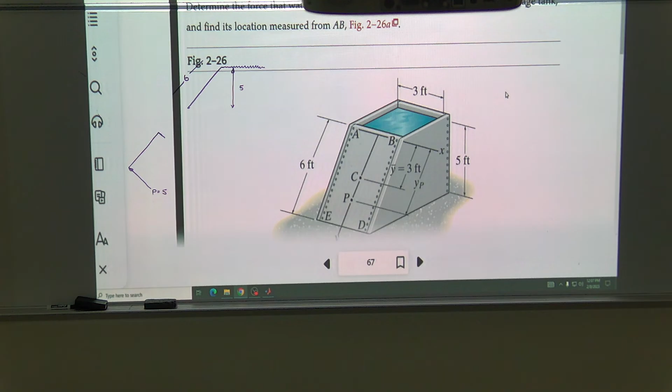Oh, water pressure. Okay, so it is water. So it is gamma times H, which would be 62.4 pounds per cubic foot. And you drop down 5 feet to get there. So the pressure at the bottom, give me a second. Pressure, 5 times 62.4, 312. So the pressure at the bottom is 312 pounds per foot squared.

Now, at the top, since the water touches the very top, it's pretty much nothing. So it's kind of like that now. That little part was an artifact that I should not have put on there. And so the water pressure is pushing up on this thing to try to break these little bolts or drill holes or something. So now the question is the location. He wants to know the value and the location.

In this particular situation, you've got an area which is 6 by 3. So the area back here is 6 by 3, or 18. And the load itself at the very top, if you look at this from this standpoint, you say, I want to turn this into a statics problem. What you really want to do is take how many pounds per running foot. So if I take this and turn it all the way over like that, I will have something like this.

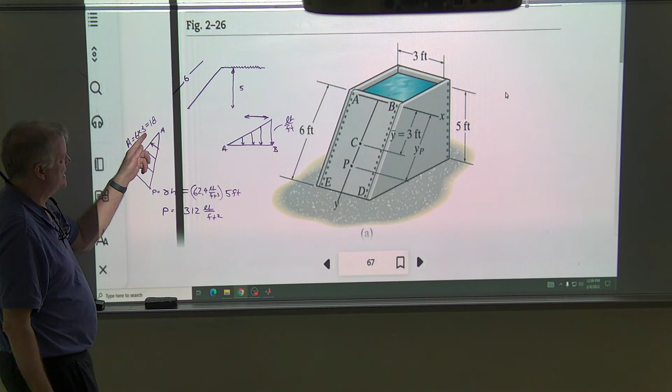So for example, this is point A and this is point B. B being the location of the heavy, A the light. So I essentially took this thing and turned it all the way around like that. Now it looks like a statics problem. However, in statics, you wanted the pounds per running foot running back and forth this way. So what do you do? You multiply it times 3. So essentially, this will be 3 times 312, or 936 pounds per running foot. 3 times 2, 6, 3 times 1 is 3, 3 times 3 is 9.

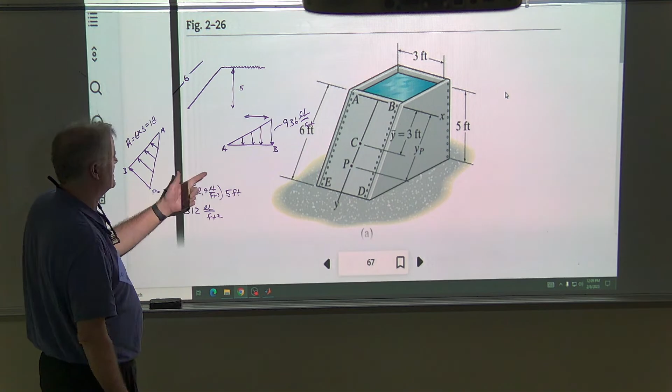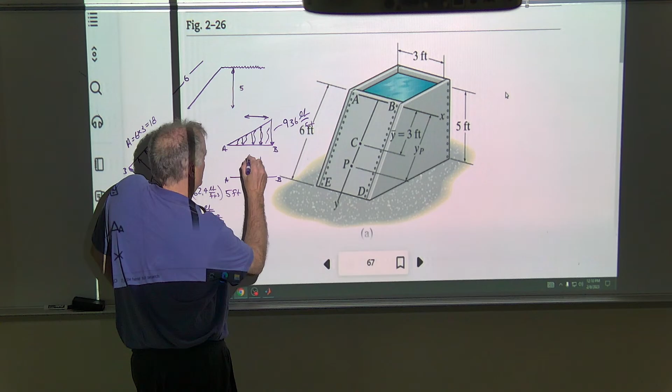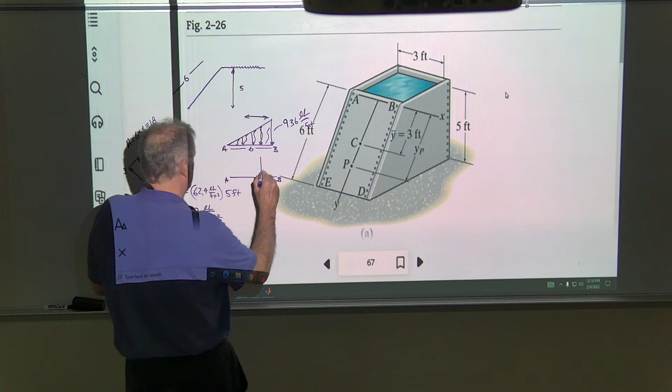Now, you want to replace it with B, A, and a load that sits right here. So what you're doing now is like you did in statics, you find the area of the load diagram. So it is 6 long, and you want half of it because the upper part is gone. So you want 3 times that. Now I've got to do 936 times 3, 2808, and it is located 1/3 from the heavy side. So it just turns out that that's 2.

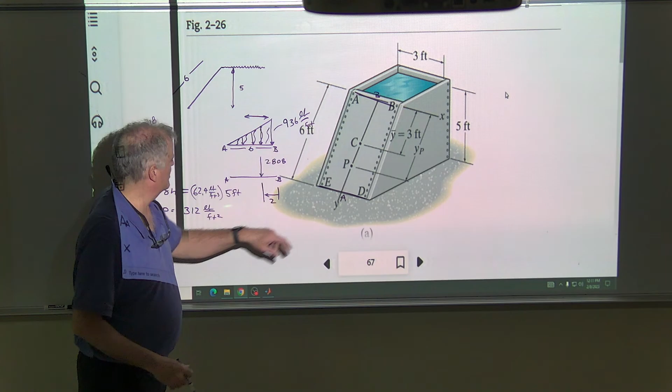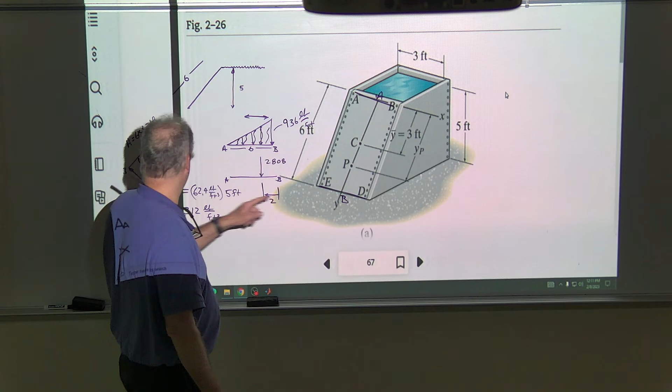So that's the location. The heavy side, now you have to realize this was back over here. So this is essentially the A line, and this is my B line up here. I'm sorry, I got those backwards. B is where the heaviest part of the load is, which is at the bottom. And A is where there's no load, which is at the top. So in fact, if this is 2, then that's 4.

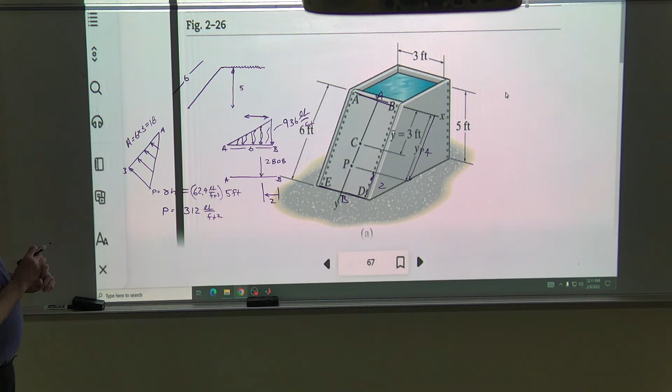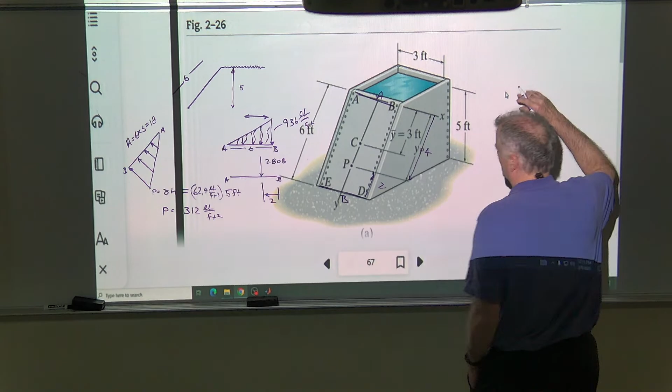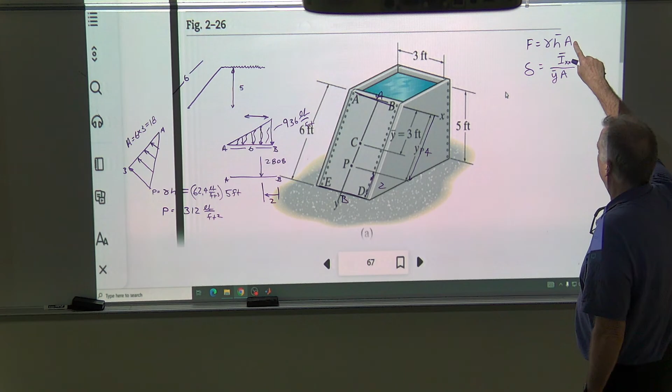Now, let's do this the other way. This is what they call a pressure prism. The other way is you use 2 sets of equations, and this is the reason I picked this problem. F is equal to gamma H bar A, and a little delta is equal to I bar XX over Y bar A. Now, let's look at the top one. The force is gamma, 62.4, the depth of the centroid, and the area of the whole plate.

So here is your centroid. This is C. It is 3 down, but it is also 2.5 here, so its depth is 2.5. Find the depth of the centroid, not this distance, but that distance. This would be classified as Y bar. This is classified as H bar. If you go vertically down, that's H. If you're going out the line of the gate, you're going out the Y. So H bar is 2.5, and the area of the whole thing is 3 by 6.

If you multiply all that out, 2.5, 2808. Okay, turns out that's the same thing you got over here. Now, this other term, what is it? First of all, Y bar and A, that's pretty simple. Y bar is 3 and A is 18.

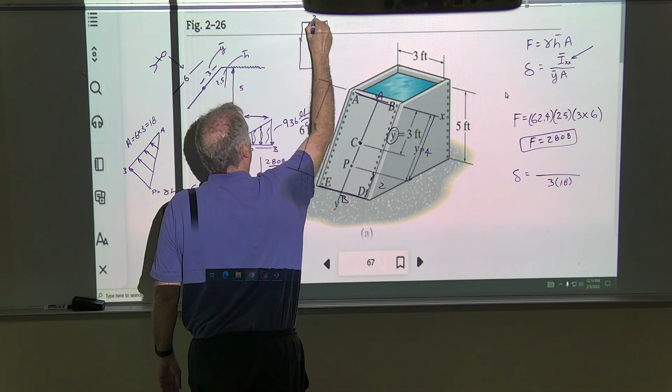But what is that? You stand here, like inside the tank, or maybe out here. You look straight down at this thing. What do you see? You see a box that is 3 wide and 6 tall. The bar says you look straight at the centroid, and then you tell me what I is at that point. I do 2 X's because they're supposed to be 2; it's a tensor. And it's 1/12 the base times the height to the third.

What's the base? The base is 3. Height is 6 to the third. That's the term that ends up on top here: 3 times 6 to the third over 12. Now, let's figure out what all this is. It's going to take me a minute. 6 times 6 times 6, and then divide by another 3, then divide by 18. It's 1.

Now, think about this. What is that term on the drawing? That term is very specific. Here's the centroid. This is where the center of pressure is. Center of pressure is the location that if you broke this down to one load, that's where it's equivalently going about. The distance from the centroid down to that is what I like to call delta.

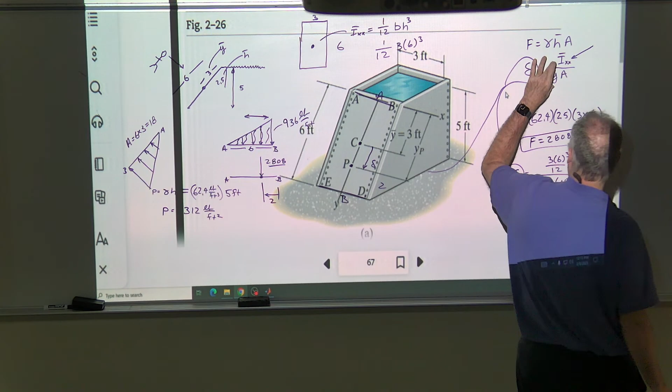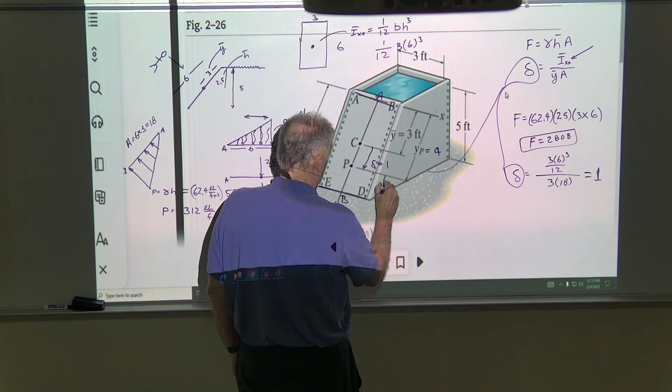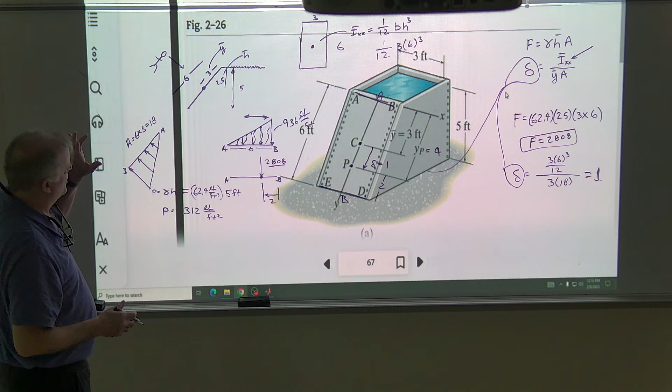And that's, in my mind, what I see. I have to remember that, and that's it. So it turns out that makes this equal 4, because that's 3, this is 1, that makes that still 2. So you matched and got the same answer that way as you got using the pressure prism. This works well if it's a flat plate like this. In other words, the depth doesn't change.

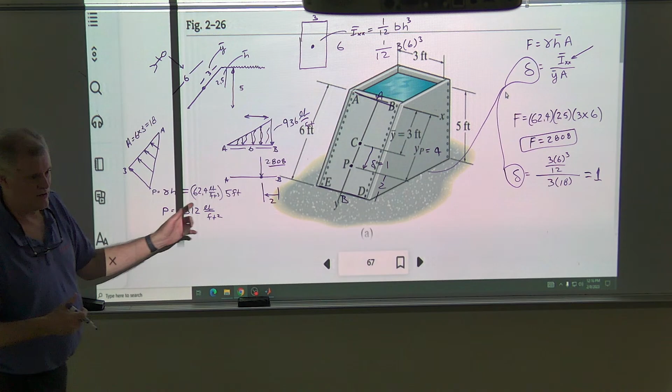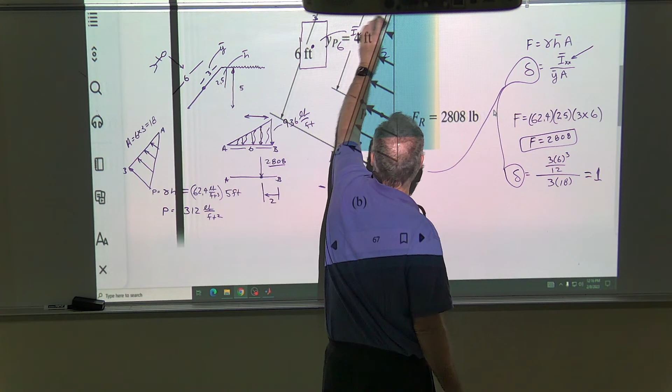And that's why I was going to do this one and then roll to the next page. So let's see what he did on it. It looks funny and skewed here, but the main thing, these are 90 degrees. They should always be 90 degrees. They kind of don't look like it, but they're supposed to be 90 degrees. So of course he got his resultant force of 2808, and he put down 4 and 6, and he's done. I do not know if he did this the other way.

He did. Okay. So let's take a look at the term he likes and the term that I'm doing. So if you look at this equation, you've got your gate here, and it was 3 down to here. In other words, this is 3. Then this is what he calls center C, and here's the location of the pressure force. So if I take this and move it to the other side and call it delta, that's what delta is.

That's why I just have to remember that. If you want to remember the whole thing, that's great. I remember this, and I remember this is how far down past the centroid to the center of pressure. So of course, what does he have? 3 foot, plus 1 foot. And that's pretty much it. So I will always write them like that, and then remember that that's how far below the centroid the center of pressure is located. Okay.

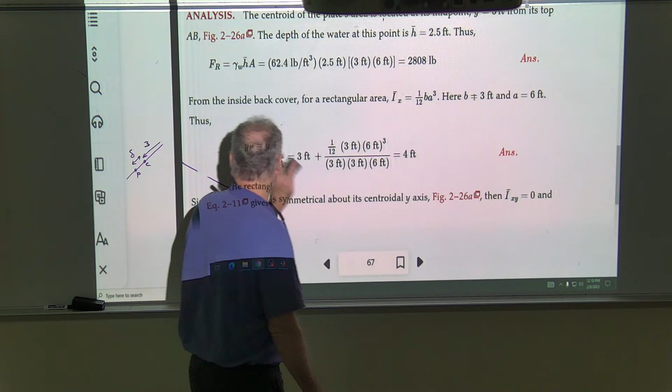Now they recognize it's a tensor. And so that's just mundane to me. It's a tensor from day one. It's always been a tensor. Tensor means it has 2 components. You have already dealt with tensors. Here's your cube. You put a normal stress there, and depending on your notation, it'll be the X direction and a face. And what do you do up here? If that's X, let's say this is Y, and this is Z. So what is this now?

Some books will list this as being tau, but if you get into continuum mechanics, they're basically the same thing. So you'll have a face direction, and then another direction. So this has 2 directions associated with it. So these are tensors. Guess what? So is this. Actually, there are components you can get into, the Z component. If you get into dynamics, bodies have an inertia about all three axes. It's an actual tensor. You can line it up and find principal axes of it, like the Mohr circle.

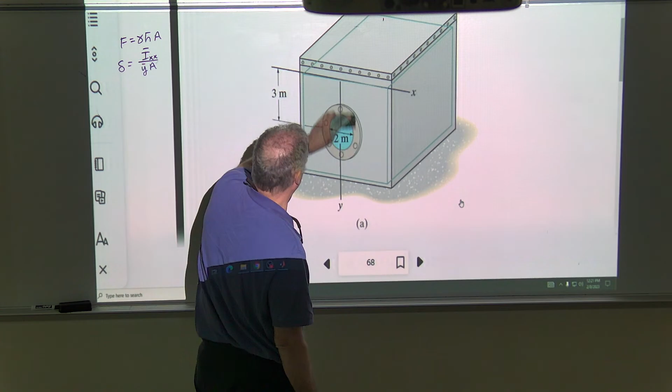And then you get a little longer, further down, it's all the same. And then what happens, you get down to this last little part and you get a little small sliver in which it doesn't contribute as much. So you can't use the pressure prism very easily unless you're willing to look at the actual volume, which looks,

I don't even know if I can do this, but it looks like an object which, if you extended this circle out in a drawing and sliced a plane through it, what you're going to see is out here, this big long oval, and the volume is associated with the internal part, in which part of it was a circle and part of it was an oval that you sliced through there. Good luck with that. I'm not doing that.

I'm doing this. So what do I have to do? Well, right to the centroid. I know that's a circle thing, so I know the centroid is at the circle. So F is equal to gamma, which I guess this is water. Water, yeah. Oh, and it's meters too. So it's gamma, H bar A.

Well, gamma for this is 9810 newtons per meter cubed. Why? Because density is equal to 1,000 kilograms per cubic meter. And if I want to multiply times g, that would give me this, where g would be 9.81. And then this is a definition. This is kind of how the SI system was set up. Part of it is that water maintains that 1,000 kilogram per meter cubed. So it turns out gamma is that.

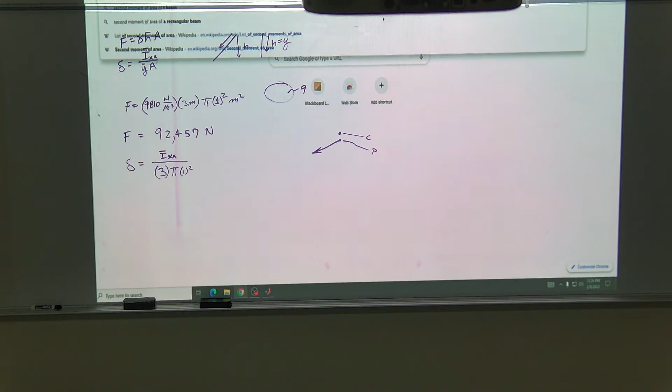So, if you got the angle back here, well, okay, that's fine. This is H, and this is Y. But if it's vertical, guess what? H equals Y. And so you can just as easily put 3 down here, and pi times a radius of 1 squared. Now I got to go find that. And so that's where, I know there's different places you can go search for that. I'm pretty sure there was, oh, there it is. That's what I was about to say.

Okay, so here I go, D. So it's pi, or say, okay, let me repeat myself. Pi r to the 4th over 4. Hey, that's convenient because I think r in our case was 1. That's really nice. So you notice it's the same because if you tilt your head, it looks the same.

So I end up with pi, and r in my case was 1, and so then I get a 4 underneath, and then a 3, and then another pi. So I get 1 over 12, I think. Okay, I'm not betting anything on this, and so that's kind of what I see. Because I got a 4 times a 3, right? Because the length down to there was 3. Okay. Notice something else, and let me get to the picture, and I'll bring this up. Okay. So here's what's funny. Let's look at this term.

Okay. I don't really care. Let's not worry about this, and let's not worry about that. But let's look at this for a minute. So here's what's so interesting.

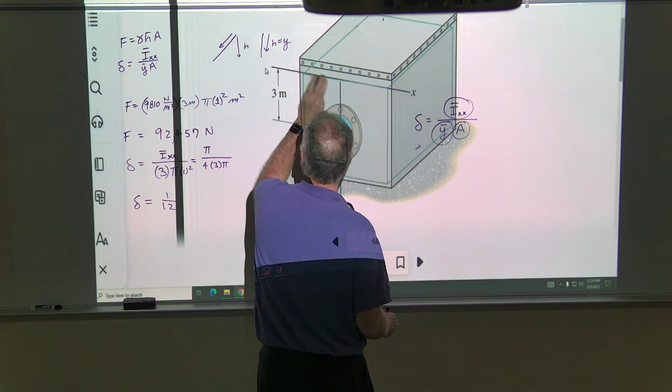So let me get some of this off and let's see what he said. I would be surprised, shocked, and stupefied if he didn't do it the same way. Okay, so here he gets 3.08. Okay, I didn't finish it. Okay, so there's his delta. So I went 3 plus 1/12 is equal to, and that's what he's saying. 1/12. Okay, is 3.083333. So that's what he's got here. This is what I'm finding. This is my

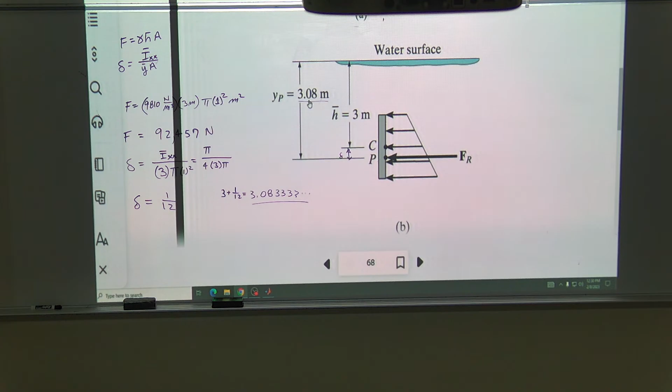delta. And like I said, the deeper you go, this shortens and shortens to the point where it never really touches it, but if this is a window on a submarine that's facing vertical, you get a couple miles deep into the ocean, pretty soon that location of that load is pretty much right there at the centroid.

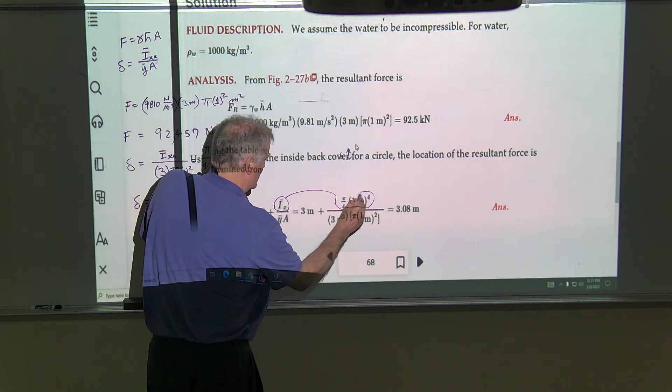Okay, so here he's got his 1,000. This is the rho, times the g, times the h, times the area. And he did the 1 meter squared too, good for him. So I got the 92,457, he got 92.5. Using the table on the inside back cover for circles, the resultant is that. I didn't look at the thing there, but that's what I got off of Wikipedia, whatever. And there it is.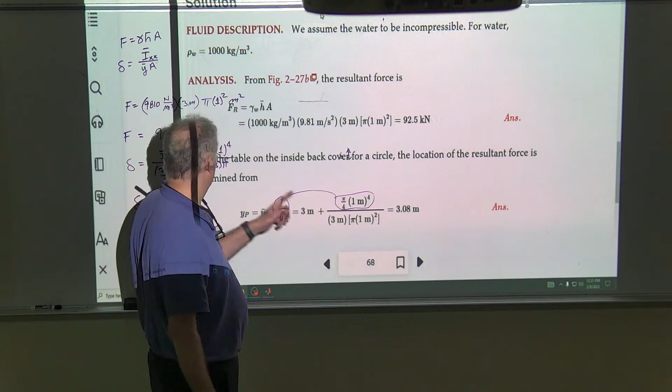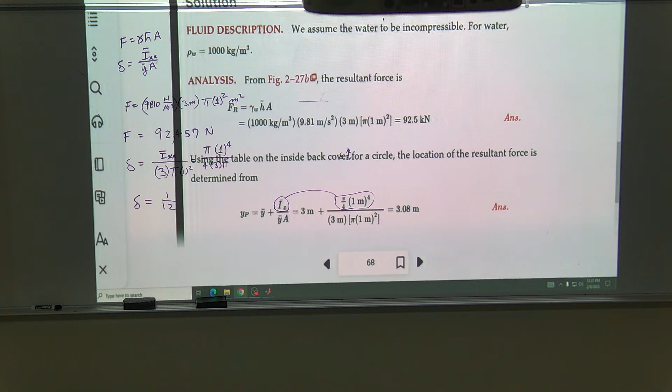Now I was lucky because my R was 1, so I never wrote R, I just didn't write it. So technically, I should have, but I didn't write it. He did. I didn't. And I should have. So he wrote the 1 to the 4th. I should have written the 1 to the 4th. So we got the same two numbers. And now you have everything you need. You need the force and the location of the force. And that's pretty much it.

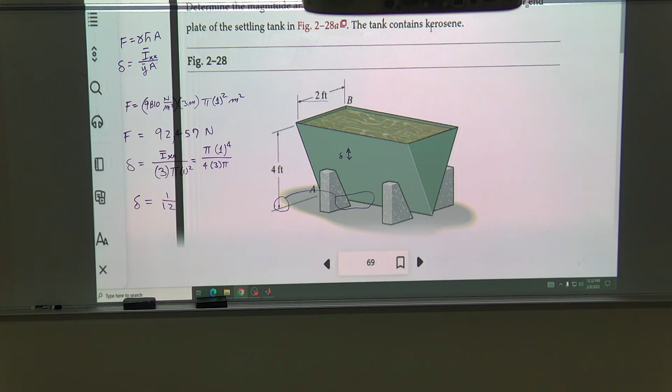So there are problems that have oddball shapes that you have to use this for. I don't even know what the next picture looks like. It's probably a triangle, there you go. Okay, determine the magnitude and location of the resultant force acting on the triangular end plate of the settling tank. So in other words, he doesn't want it to break off down here. And so I guess we could do that real quick. It's a 2x4. It contains kerosene.

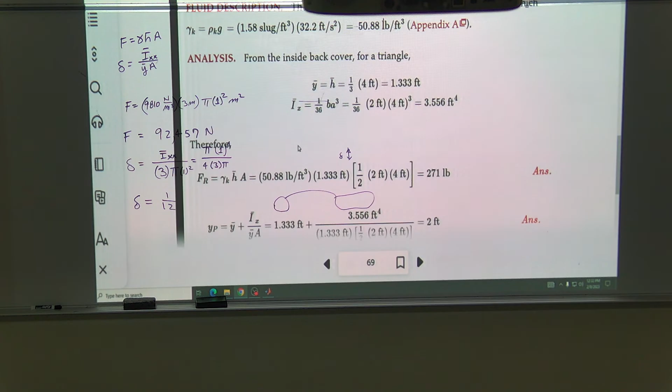So here he just puts the resultant load, the y down to the P, but he didn't tell us the centroid, but the centroid, even though the triangle is listed this way, it should be 4/3. Did he put it anywhere? He didn't put it anywhere. It's okay. He should have. There it is right there. So we'll just look at this one real quick. It's the same procedure. I'll take this one, and then I'll look at this one, which is my delta, how far below the centroid. So he found the centroid is 4/3.

And then he found the Ix of that triangle, put that up there. But before he did that, he found the kerosene thing. I don't know what the kerosene is. Here's the distance, the h bar, and then the area, it's a 2x4 triangle, but you take half of it, you get 271 pounds. Then of course, you found the centroid a minute ago. But then he does this part up here. So he takes the I bar xx, does the 2 and the 4, gets the number, and sticks it right here.

Then he does the Y bar, and then the area, which is the same area as it is right there. And he gets that it's 2 feet, or this far below the centroid. So that's where he put his picture at. If you notice, it's 2 feet, right? For me, I would have gone in and I would have found this, and that would have been

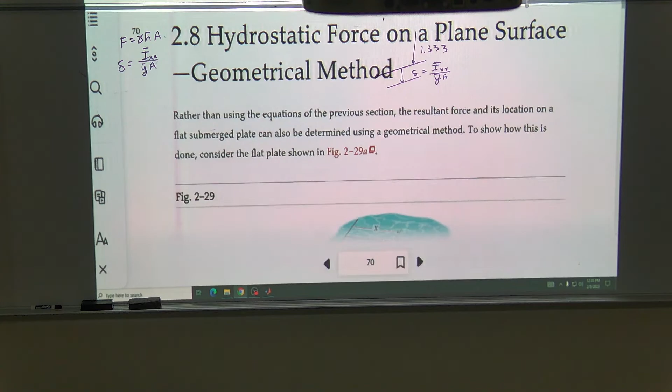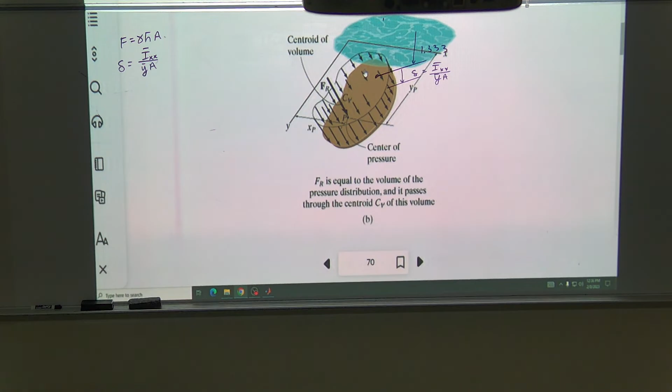Okay, that's a plane surface, geometrical method. Okay, so this is the, I think it's funny that different books call it different things. This is called a geometrical method. In other books, it's called the pressure prism. So it is a prism in which you take, believe it or not, if you wanted to do that, you could do this problem in a CAD thing.

You could draw your surface, right? And then extrude it backwards. And then slice it with a plate. So that's all you're doing, slicing the plate, and then you're working on the prism. Essentially, you have an object, and maybe one day I should do a video on that. Odd-shaped object that is shorter on one end than the other. So it is this object, right? And you find the volume of the object and the centroid of the object.

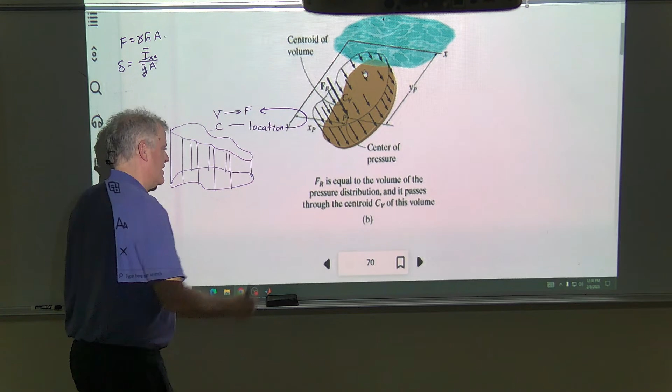The volume would be related to the force. The centroid would be the location of that force. And maybe I'll do that one day. And maybe I'll do it this Friday as a replacement. So I might just, I don't know, I'll send you an email later. So we may or may not meet this Friday.

If I do that, I might just pick a problem, because sometimes it's beneficial to see how you do stuff. And if you have a CAD package, and most CAD packages have an extrude, don't they? I mean, I have a real cheap one. I'm not advocating this one or anything, but I had it for years, and I know how to use it. And so it's not the best one out there, but it's related to ages and ages ago.

But the thing for mine is, I paid, now they're doing subscriptions. Oh yeah, that's great. Everybody's getting the subscriptions. But anyway, I paid $70 for mine way back, and I didn't have to do a subscription.

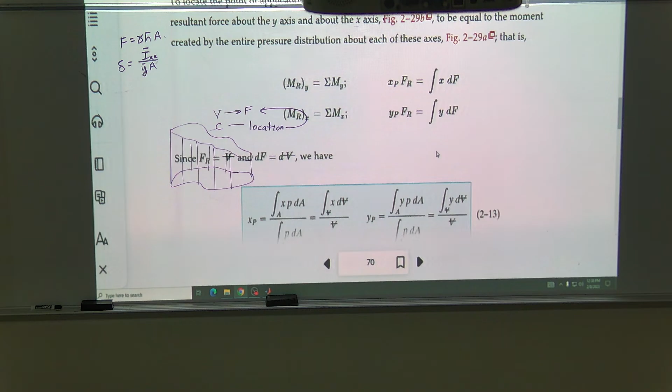So the thing I do there is you can make an object, extrude it, and then slice it. And maybe I'll do a particular problem in the book that way. And that way it gives you an idea of what you're actually doing. So what you're doing is you're integrating over the surface, which, the resultant force is the volume of the pressure prism, and then the location is the centroid. And instead of doing all this math for a weird surface, you can just do it in a CAD package, and just push a button.

What's the volume of that object, and where's the centroid? And those two things, that's what you get. So maybe I'll do that. So be looking for an email. That'll give you some idea of a different way of doing it.

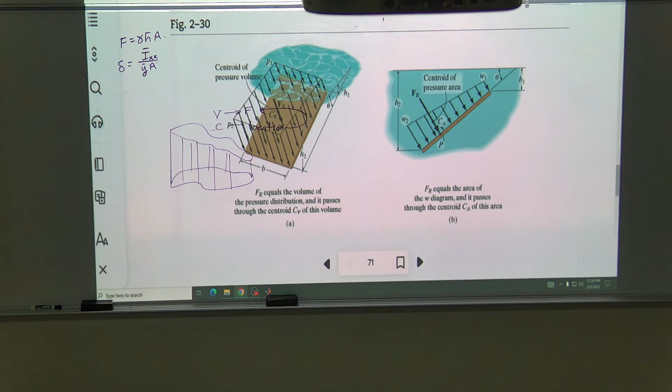I don't think you can extrude. There's this. Okay, so there's also FreeCAD. That's one thing. And then there's something called, let's see if I can find this one. Okay. This one's kind of nice because you don't pay anything for this. And it's an open source platform. It comes out of France. And if you look at it, it comes out of a multinational company that has 30,000 employees. So they've got a lot of, the thing really, that's the one I use right there.

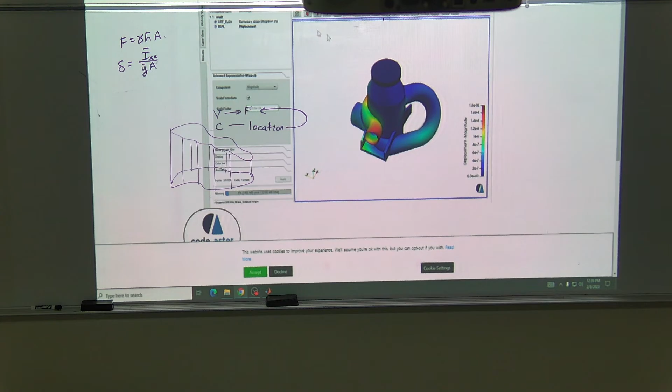And so, in other words, there's many different interfaces. You do not have to use the finite element associated with it. You can just use the CAD part. So maybe I'll do that. Maybe I'll make a little surface, extrude it backwards, and then slice it, and then look at the volume and then the centroid, and I'll pick a problem out of the book that's kind of bizarre, and maybe I'll use that one instead.

Because think about it, you can just download this thing. It's free. So instead of using a CAD package that you have to go pay money for in a subscription, I'll use this one, and I'll show you how to do that. I'm all about using resources that I don't have to pay for.

I have never paid for an app on my phone yet. I broke down and did an iCloud service the other day because it backs your phone up every night, and I've had an instance where I lost some pictures, and I decided, well, I don't need the stress of that.

So if you go to this, you can go to download, and there is a Windows 10 version. It started as being only Linux, and then they decided that there were a lot of requests for a Windows version, but you'll see it's 1.6 gigabytes, so it's a huge code, and it has a lot of functionalities with it, but I don't delve into all those. I delve into the parts that I deal with, and that's all.

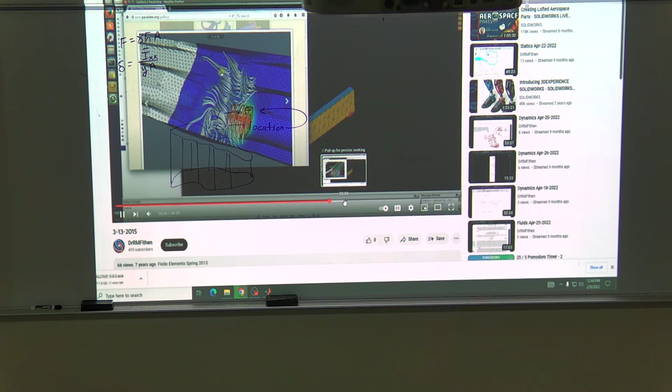Let me show you where you go to get these things. So if I just go to a browser. The code that is inside of it is Linux. This is about the simplest thing I can think of. So I'm drawing parts in there. It's essentially a box, taking you through building the part, gridding it, and then eventually static. Getting further and further, the modulus was then 10 to the 12th or something like that. Going through and doing a simulation.

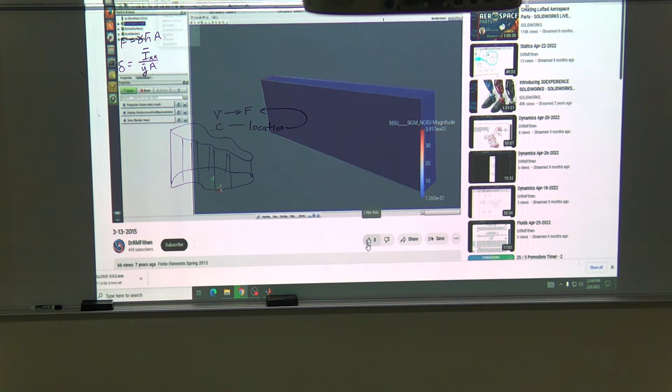And then looking at, there's the object moving up and down. So it's like a weird looking beam. Okay, so beam theory works great until you have a fat, tall beam. And then the beam equations don't work because you're mostly in shear, but you'll still get a deflection. And so if you do a simulation in this thing, you can see it, and you can get the answer. But if you make the beam thinner and you try to match the beam equations, it matches perfectly.

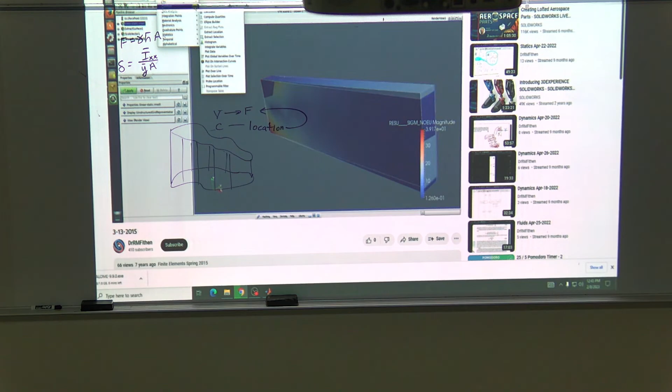Will that support SolidWorks files? Yeah. Okay, so there's two things you can do. There's, what's it called, IGES, and another one. There's two standards. I can't think of the other standard, but you can dump files out of this into that, go to SolidWorks, and it loads it right in. So you can interchange between the two. Because we don't have it to where you can do the stress analysis on the one we have at work. Using a free one would be good. Oh, okay. This will do both.

See, the thing is, if you've got SolidWorks, I would stick to the SolidWorks and dump the file and load it in over in this one, and then do the stress in that. Because otherwise, okay. Now I'm speaking from inexperience, because I've spent a small amount of time on SolidWorks, and then I spent a large amount of time here because I'm not willing to pay.

So this is just my gut reaction: I can learn on this Salome CAD and figure out everything, and if it changes versions, it doesn't change that much. And so I've learned how to do that. Now, I'm not going to go back and learn SolidWorks in order to do that, but if you've got the experience doing SolidWorks, and everybody does, just dump all your files, pull them over and pull them all in, and they'll all be there.

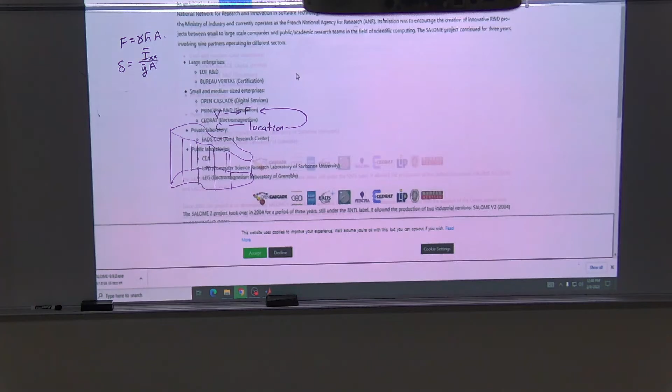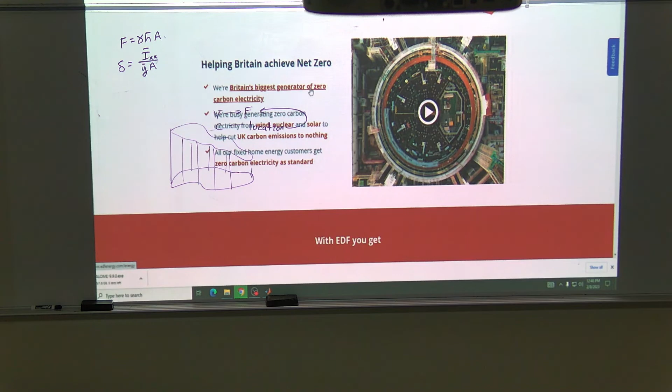What, EDF? Okay. EDF. I think it's that, but I'm not sure. Yeah, it's that company. About us. Okay, this is big. Biggest generator of zero carbon electricity, they're in nuclear and renewables. It's a big energy company. It's European, so it's pretty large. Okay, what in the heck? I don't know what all that is, but I think one time I saw it was like 30,000 total employees worldwide. Let's see if I can find it.

I may be able to find it on Wikipedia. Usually you can. Oh, okay, here we go. It's out of Paris, founded in '46. 165,000 employees. Revenue is $84 billion. So inside this company is where they developed this. It meets the European nuclear regulatory body, so it is an all-encompassing huge code. It has everything, including contacts, and that's hard to find.

In other words, if you had an object, say a piece of metal, and it came down on the body and started pushing and sliding it across, you have friction, but you also have force that's transferred through that. That's not a connection. That's a different way of modeling, and most finite element codes struggle to do that. But this one has 4 or 5 different ways of interfacing two objects. So if you had friction occurring inside a motor or something like that, you'd have to model it. It takes a face, and off of all these faces, it comes up with a friction coefficient across each one.